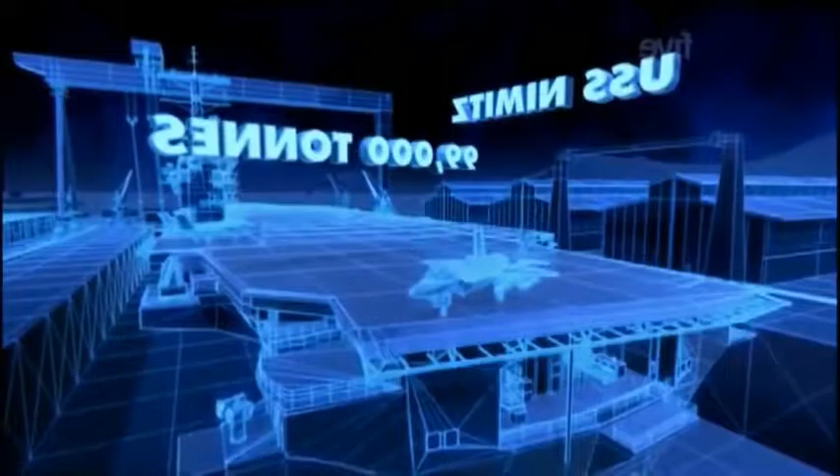There have been 7 key stages in the development of aircraft carrier design, and 7 key carriers. At the heart of each vessel lies a major technological advance that allowed them to increase in size. One by one, traveling up the scale, we'll reveal the thinking behind each breakthrough. 7 ingenious leaps from big to bigger into the world's biggest.

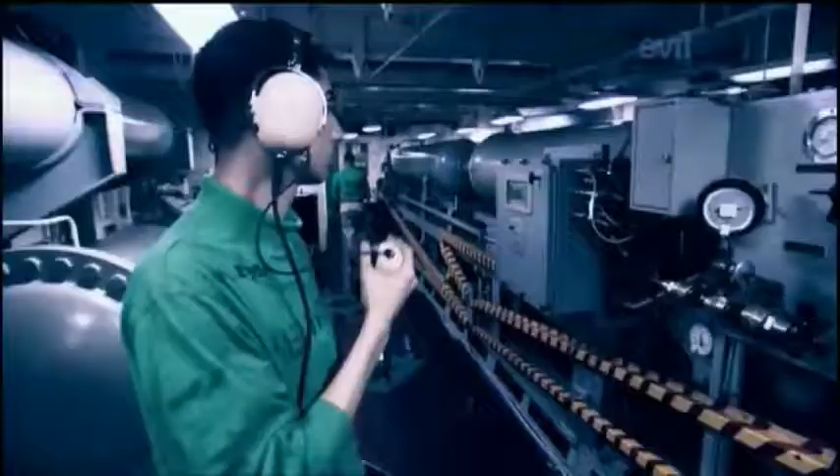The Nimitz can cruise at over 55 kilometers an hour, sail for over 20 years without refueling, and house 6,000 men and women. She can detect threats over 500 kilometers away and launch a supersonic fighter every 20 seconds to intercept them. She is a masterpiece of military engineering.

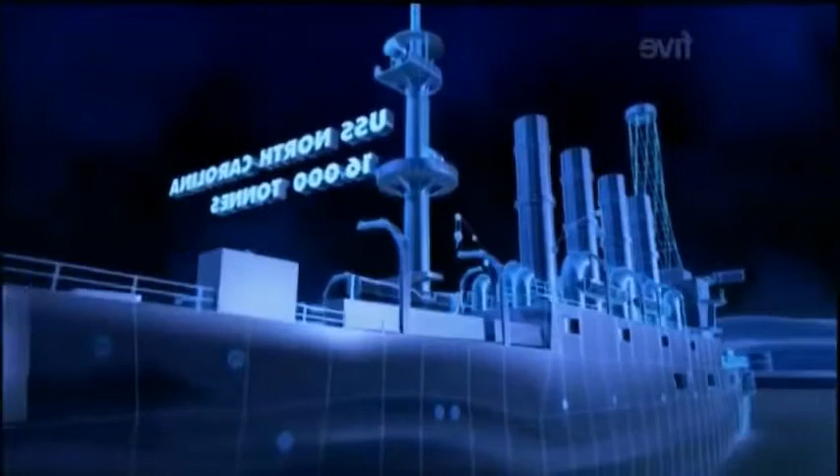To understand how the Nimitz became the most powerful warship ever built means traveling back to 1916. Almost as soon as people learned to fly, the US Navy saw the potential of launching warplanes from the deck of a ship. That ship was the USS North Carolina. Reaching takeoff speed requires a long runway. But the decks of warships were crammed with weapons and equipment. There was no room for a long takeoff strip. So engineers had to devise a way of getting an aircraft up to takeoff speed on a very short strip.

The fundamental problem is down to a basic law of physics. If you want to launch a large mass in a short space of time or distance, you've got to give it a lot of stored energy very rapidly. This is the basic kind of technology that's been known for thousands of years, the slingshot. I store the energy by stretching the elastic. I put my aircraft in it, store the energy, let go, and it flies wonderfully. But of course, this isn't a real aircraft with a real pilot. The challenges of making it work in the real world are much more significant.

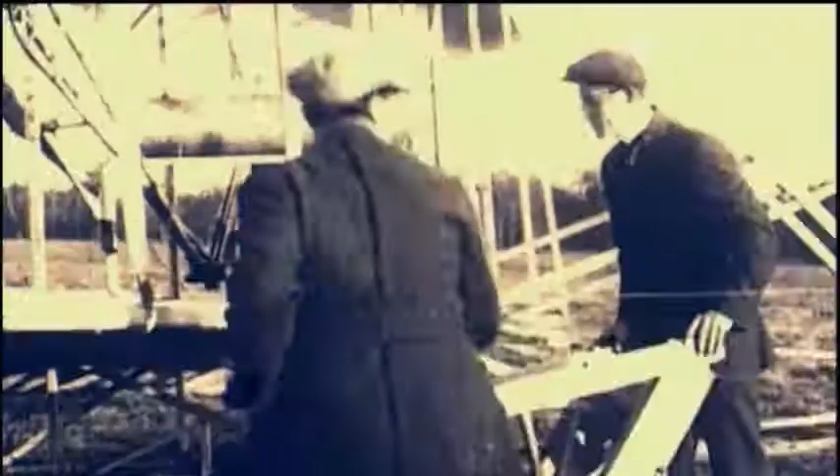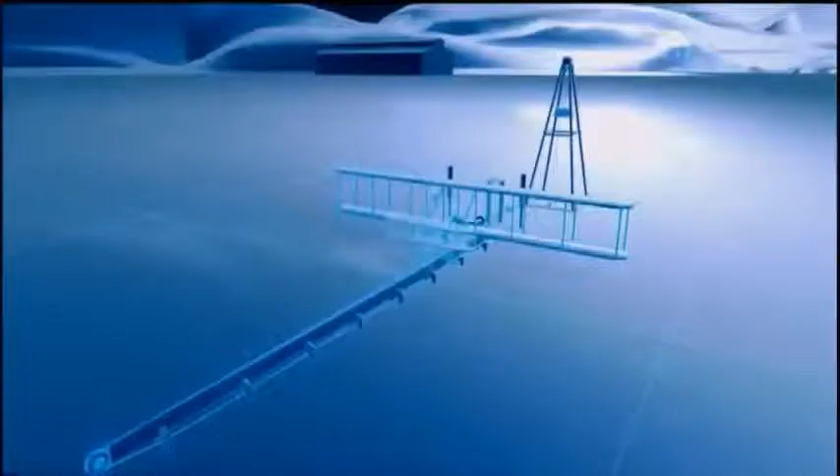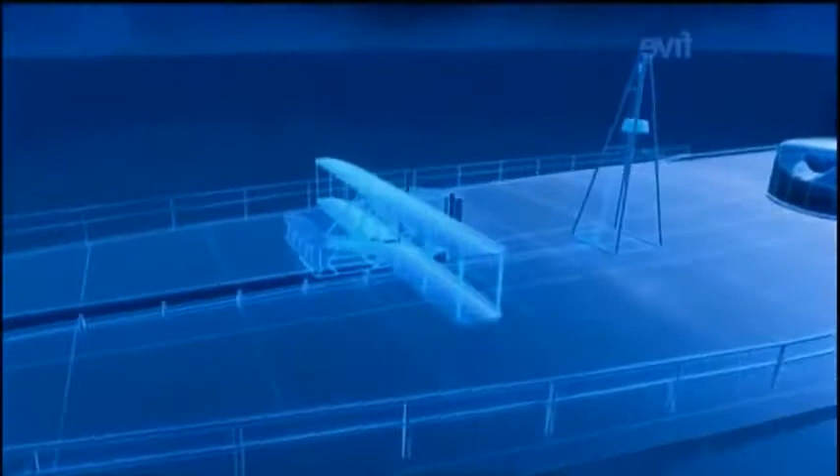The solution came from the fathers of aviation, Wilbur and Orville Wright. In 1903, they made the first powered flight and went on to develop their own launcher, a catapult. Their design consisted of a 6-meter-high wooden tower. This held a weight suspended from a rope. As the weight dropped, the rope pulled the plane along a rail until it reached takeoff speed. The Wrights offered their launching system to the US Navy. But dropping a heavy weight on the deck of a warship was not such a good idea. The Navy went back to the drawing board.

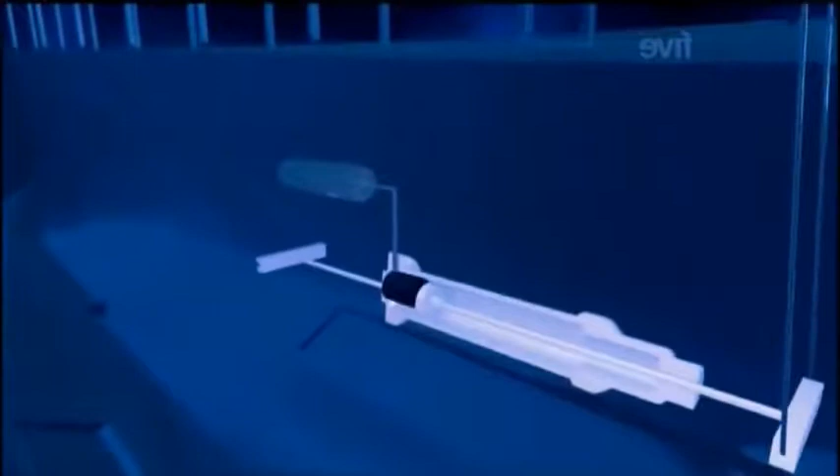So they came up with a better idea. Another form of stored energy on board was compressed air, installed in warships for things like launching torpedoes and so on. Compressed air can be released and give thrust. So in a simple way, we can use compressed air to release an aircraft from a warship. In 1916, the US military tried out the idea on the armored cruiser USS North Carolina. Engineers built a 30-meter steel track at the stern of the ship. They used compressed air to shoot a piston down a cylinder. The piston used a rope to pull the plane along the track.

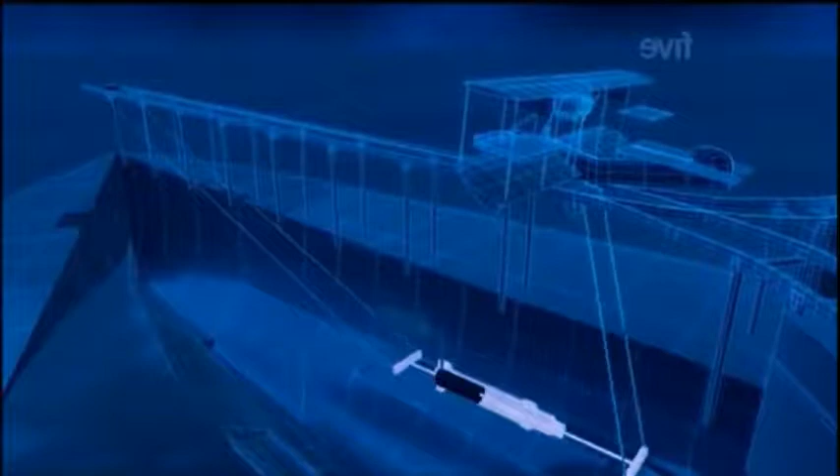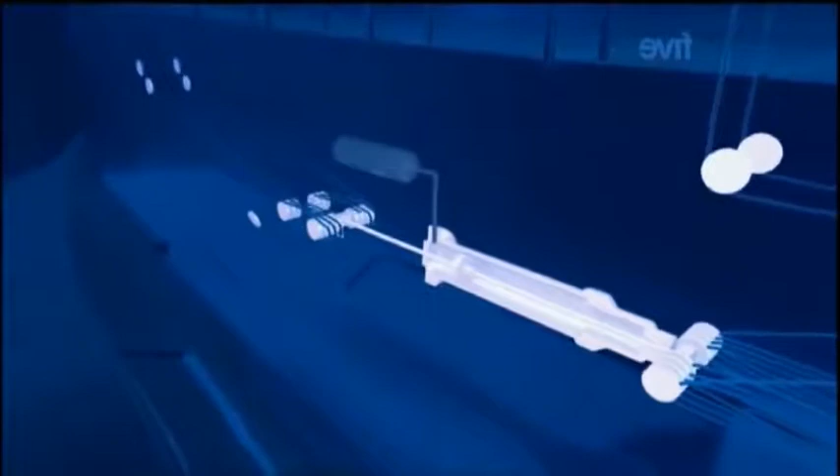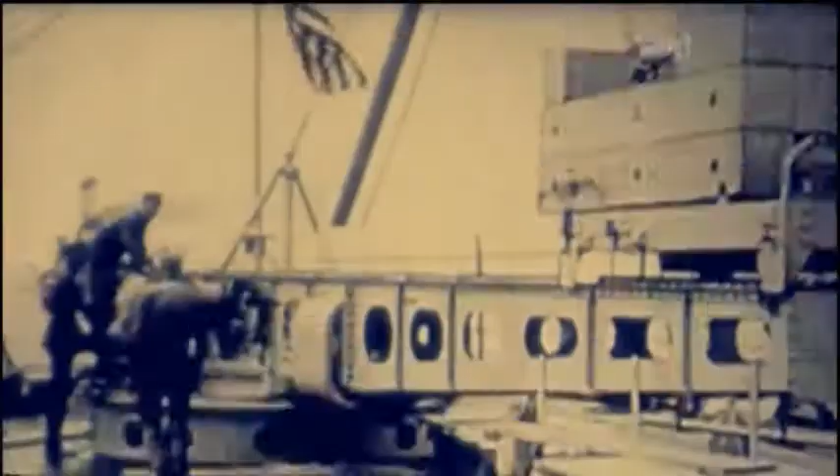But compressed air alone was not powerful enough to launch an 800-kilogram plane. To speed it up, they fed the cable through a system of pulleys. These multiplied the force and increased the plane's speed sevenfold. The system took years of trial and error to perfect. Before this invention, the might of a naval power had been measured by the size of its battleships. But now, the flimsiest biplane launched from a carrier could sink the biggest warship. The aircraft carrier had come of age.

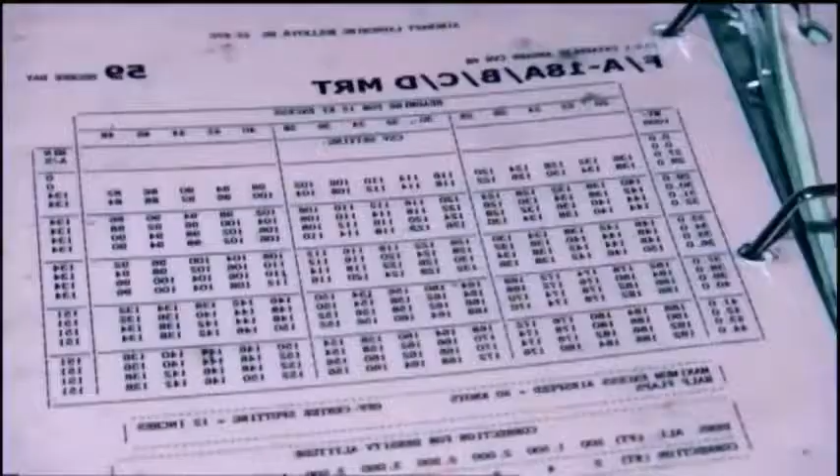Today, catapults are at the working heart of the USS Nimitz. Without the catapults, we have no other means of getting the aircraft off to do their missions. It's basically just a giant slingshot. It's the task of the shooter to tune the catapult to launch aircraft of different sizes. As a shooter, my job is to take the weight of the aircraft and the wind that we actually have over the deck and use that to determine a setting that we put into our catapult system to shoot it off the front. Lieutenant Kozlowski adjusts her catapult to launch a series of F-18 fighters. Each catapult has enough muscle to throw a Land Rover a kilometer.

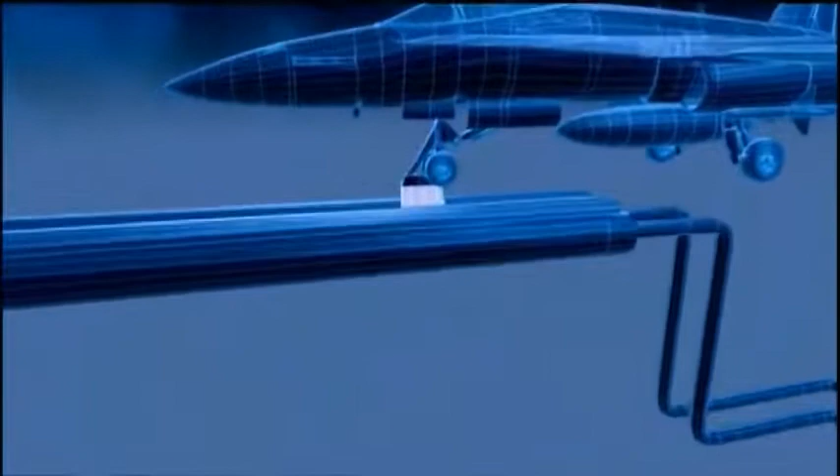The secret of its power lies hidden beneath the deck. Instead of complicated pulleys and wires, the Nimitz has a pair of cylinders slung below its runway. Inside these cylinders are pistons. The pistons connect the plane through slots at the top of each cylinder. They fill the cylinders with pressurized steam which shoots the pistons and the plane forward. To prevent the steam escaping, they fit two strips of flexible metal that act like zippers and reseal the slots as the pistons pass through.

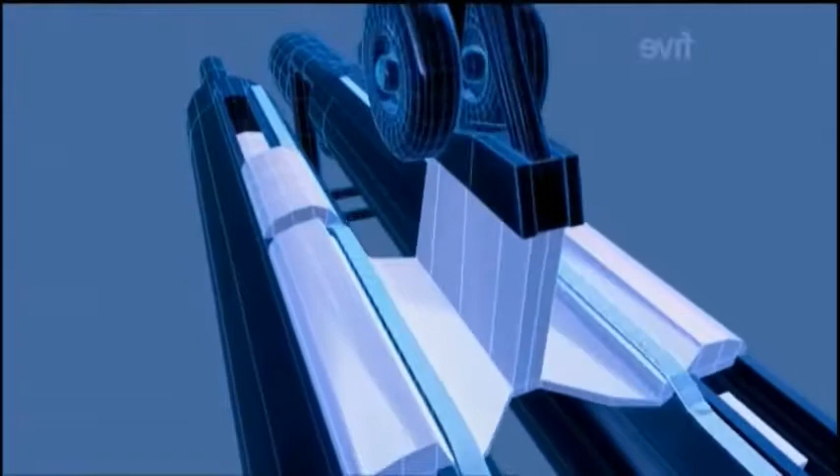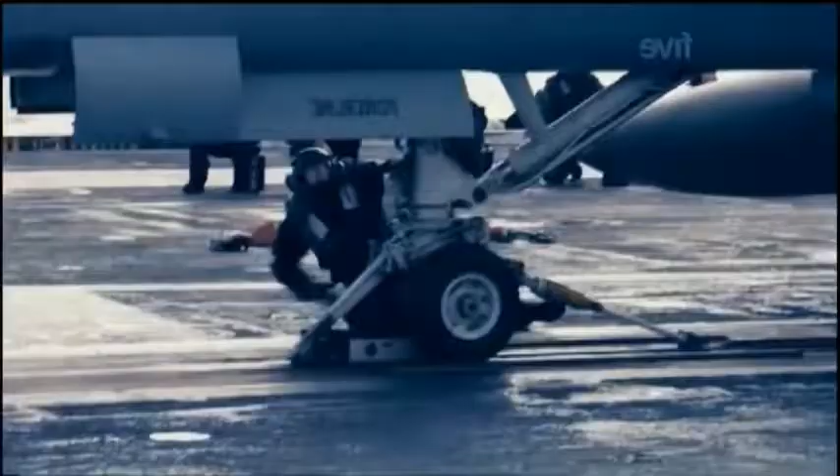They'll salute us before we send them off the bow, telling us that they're ready to go. And then we'll hit the fire button. On land, it takes over 1,500 meters to get an F-18 airborne. But the steam catapult does it in less than 100.

But in 1916, the USS North Carolina had a huge drawback. No deck for her planes to land on. So they had to land on the sea and then be winched back on board again. Hardly practical for a ship at war. Solving the problem would require British ingenuity and a new kind of ship.

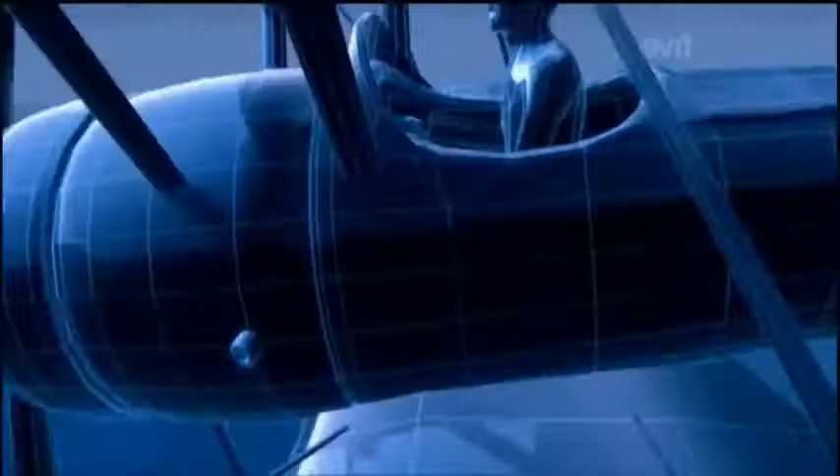In August 1917, Royal Navy pilot Edwin Dunning attempted the first landing on a moving ship. The obstacles he had to negotiate included the ship's central bridge and funnel, known as the superstructure. In a truly audacious move, Commander Dunning swooped sideways in front of them and landed on the front deck.

5 days later, he tried to repeat his trick, but as he touched down, the engine stalled and he lost control of the plane. The deck crew tried to grab the powerless aircraft, but strong winds blew it over the side. Dunning was knocked unconscious and drowned in his cockpit. Commander Edwin Dunning proved that a deck landing was possible, but it had cost him his life.

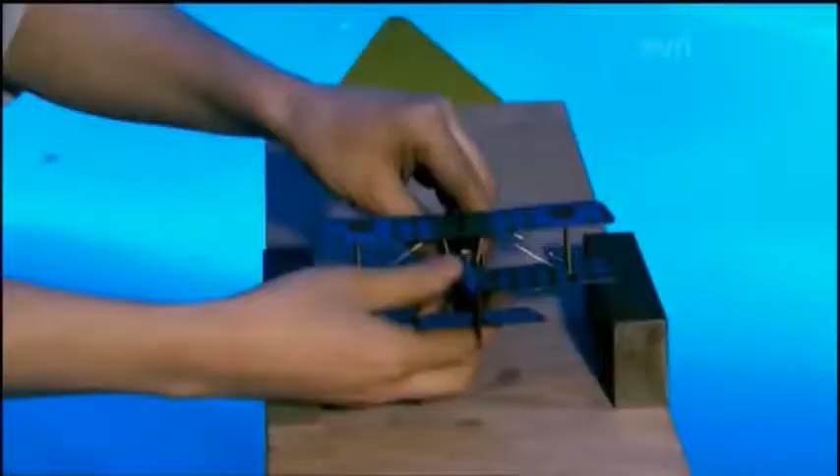Making the deck safe for landing would mean redesigning the ship's superstructure, the obstacle that had blighted Dunning's approach. One proposed solution was to split the superstructure into two parts, moving them either side of the flight deck. But the gap between the two blocks was hardly wide enough to allow a plane to land, and the designers feared this would unnerve their pilots. They considered removing one of the blocks. Not such a good idea.

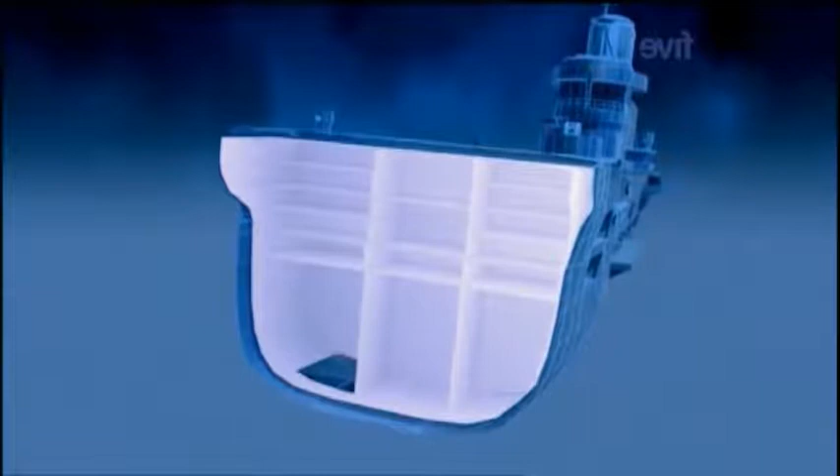The Royal Navy searched for a way to offset the weight of the block they now called the island, to correct the ship's balance. They tried filling the port fuel tanks whilst leaving the starboard tanks half empty. But as she began to run out of fuel, the ship started to list again. Then they tried moving the entire hangar to port, leaving behind an empty space. But the crew soon filled the void with equipment, and the ship regained its starboard list. Finally, they decided to physically extend the hull outwards on the port side and shifted the heavy machinery to balance the boat.

After 2 decades of trial and error, the Royal Navy now had a truly revolutionary design. HMS Ark Royal was launched in 1937. She was the mother of all modern carriers. Her island sat on her starboard side, making space for a long, clear flight deck. Her layout provided the template for every carrier to come, including today's Nimitz.

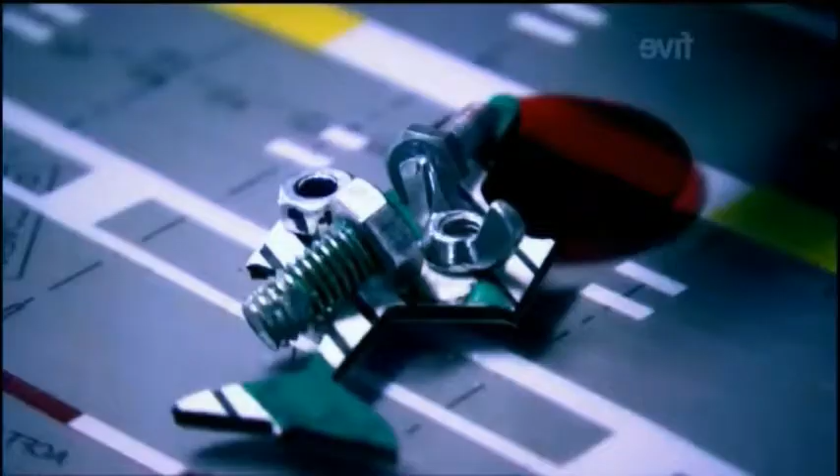Now these nuts and bolts, they represent different things. This means that it needs an aircraft that needs to be turned, its engine's turned, and then this one means it needs fuel. It helps us keep track of everything going out on the flight deck. Since it moves at such a fast pace out there, they're constantly updating this board.

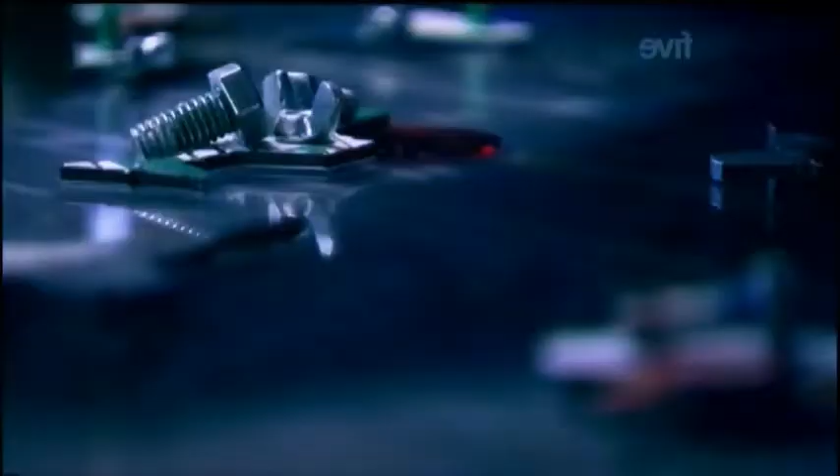Got to get him out. I got to clean up L4. I've got to drop this guy down off into the hangar. And if you want, you can put 203 on the elevator. It really doesn't matter to me. This is always reliable. If we have a power outage, I can always rely on this being up and running. Hey, before you put something in L1, make sure it's got missiles on it, right?

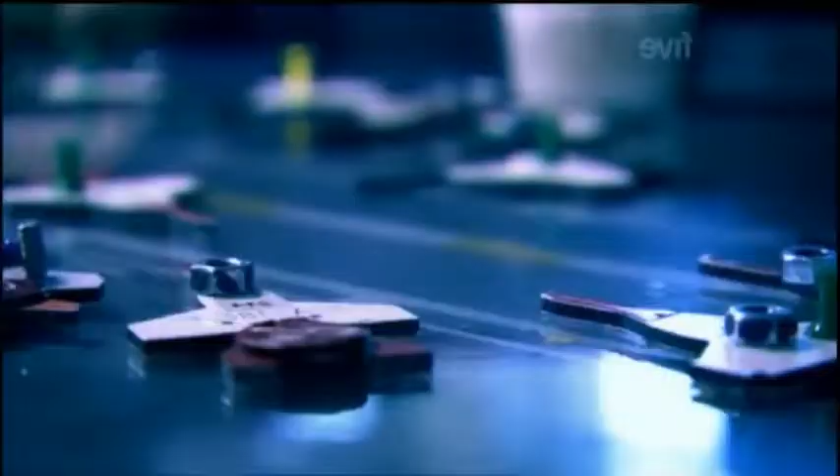The Nimitz can operate more aircraft than any other carrier in the world. Up to 90 warplanes.

In 1938, the biggest British carrier could only handle about 50 aircraft. American admirals wanted to double that number. But there wasn't enough room in their hangar to store the planes, even with their wings folded. So the deck had to take the overspill. This was potentially disastrous if an aircraft misjudged its landing.

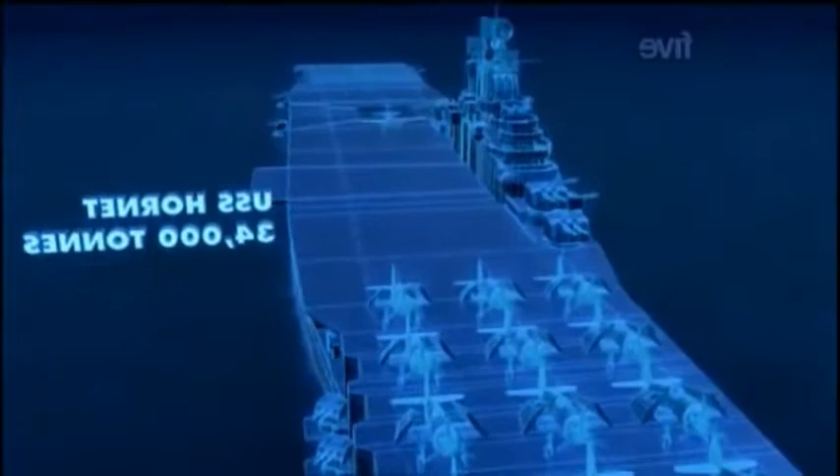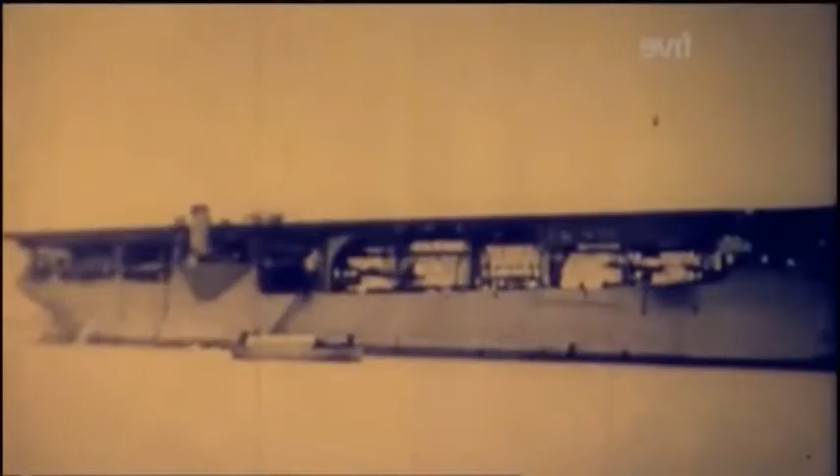To solve the problem, the US Navy had to look to the past for inspiration. From the time of the earliest carriers, engineers had experimented with ways of slowing planes down by snaring them with so-called arrestor wires. Well, the earliest systems consisted simply of ropes attached to pairs of sandbags. And the aircraft would come down and engage this rope, but of course one set of sandbags was not enough to stop a heavy aircraft.

So as the aircraft proceeded down the flight deck, it had to engage successive pairs of sandbags until there was enough resistance to stop the airplane. This simple system, of course, was nowhere near adequate for high-performance aircraft, so other more complex systems had to be developed. On the USS Hornet, they had to stop a heavy warplane landing at over 135 kilometers an hour in just 45 meters. This is how they did it.

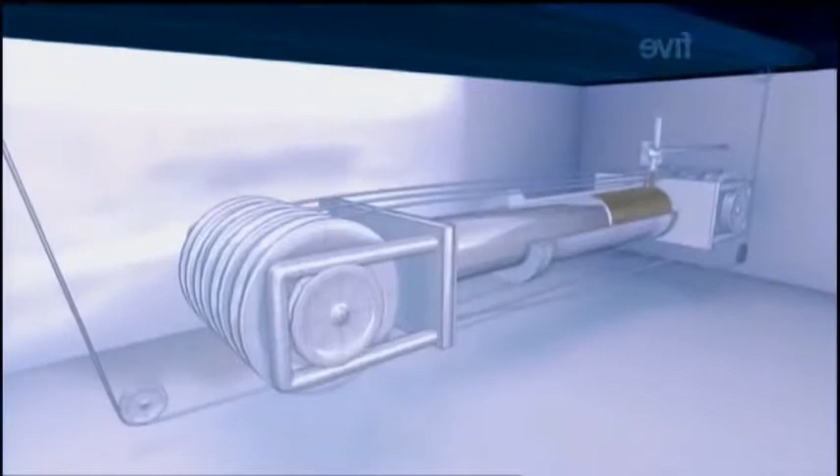As a plane lands, a hook on its tail snares a wire and pulls it forward. Beneath the deck, this action forces a ram into a cylinder filled with fluid. The plane's momentum is dampened as the fluid is squeezed up a tube and through an opening made ever smaller by a closing plunger. An elegant idea, but in practice, snagging a single wire proved difficult for pilots to do. So the engineers lined up several wires, one behind the other, to increase the chances of a successful grab. But even this didn't guarantee success.

During the Second World War, it was fair to characterize the landings as looking like a controlled crash. As the pilot approaches the back of the ship, he's going to fly his airplane into position just above the wires, and then he hopes that the airplane will drop right into the middle of those wires and pick up one of those 12 wires. If they didn't catch any of the wires, then they had 5 what they call Davis barriers that would engage the landing gear on the aircraft and stop it that way. Unfortunately, these Davis barriers normally would flip the airplane upside down, but it would definitely stop.

Today, on the Nimitz, they use a similar arrestor wire system. But trapping the wire has become even more difficult. Jets hit the deck so fast that the pilot has precious little time to guide his plane onto the wire. It's so hard that pilots have to practice over 100 simulated landings before they're allowed to try the real thing.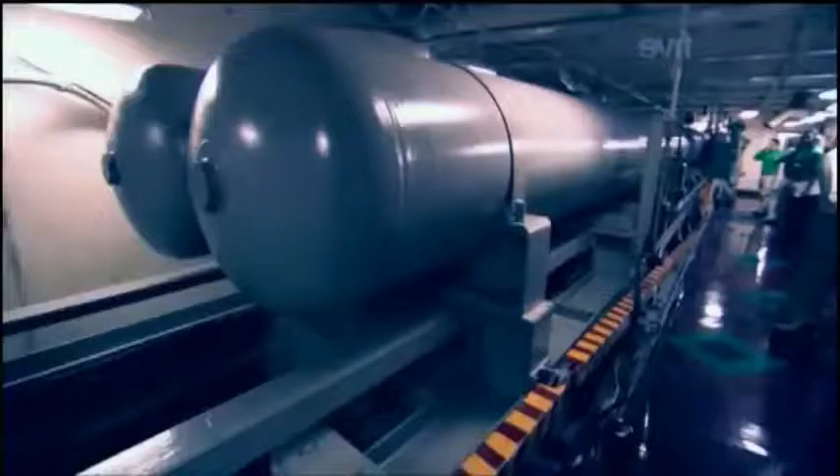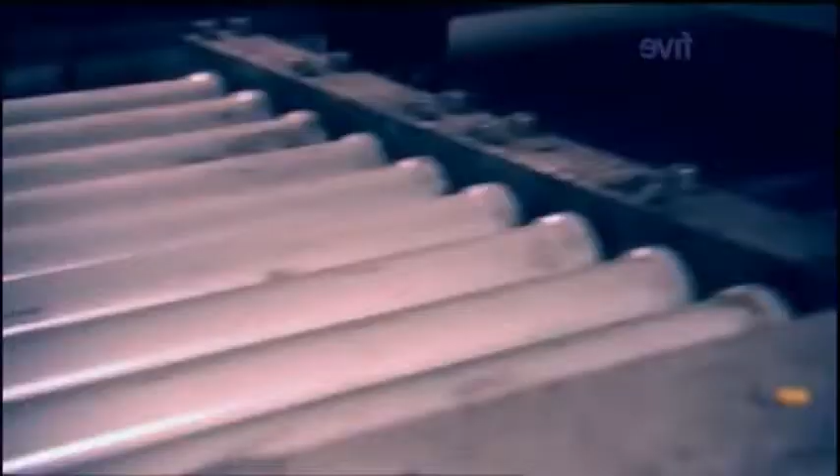The jets landing on the Nimitz push its arrestor system's braking power to the limit. It has to bring an F-18 traveling at 225 kilometers an hour to a stop in just over 100 meters. About the length of a football pitch. The quality of each landing is assessed by senior pilots standing at the stern. We will grade them on their start, the in-the-middle position, at the in-close position, and then again as they cross the ramp. And then the grade goes into an overall grade point average for how everybody's doing.

Every pilot in every squadron thinks they're the best. Definitely me. Who's the worst pilot? That guy.

The arrestor wire allowed planes to land safely on a crowded deck. But during World War II, the deck itself became a target for enemy bombers. Protecting the ship from bombs would demand a total rethink, and was to double the size of the aircraft carrier. March the 19th, 1945, a naval catastrophe. Japanese bombs penetrated the USS Franklin's wooden flight deck and exploded in the hangar below. 724 American sailors and airmen were killed. The US Navy resolved never to allow this to happen again.

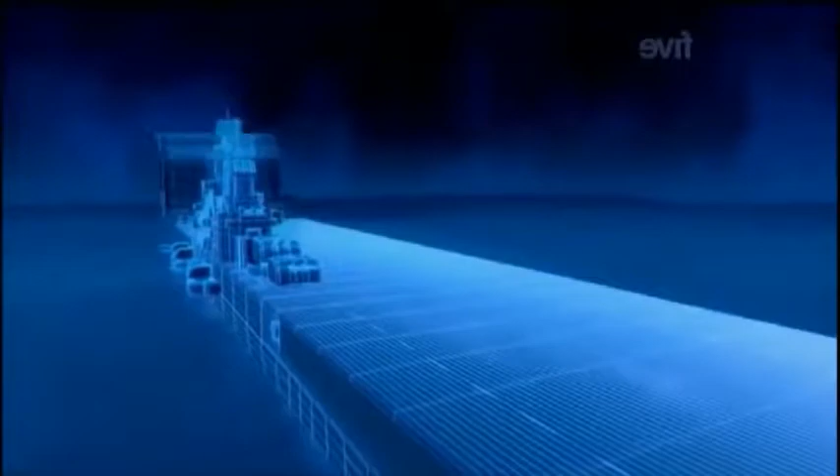They decided to protect the crew by replacing the wooden flight deck with armored steel. But this caused huge problems for ship designers. When you replace a deck made out of wood with one made out of armoured steel, your real issue is to do with adding top weight and making the vessel top heavy. This causes the vessel to reduce its stability, which makes it vulnerable to capsize in waves.

To make the ship more stable, the hull has to be made wider. But a wider hull meets more resistance than a thinner one and impedes the ship's movement through the water. To restore speed, they had to make the hull more streamlined. This made the ship longer, but also heavier.

The mighty USS Midway was the product of this thinking. She weighed almost twice as much as her predecessors, and for the 10 years after the Second World War, she was the largest ship in the world. Her deck was protected by 3 acres of armored steel, 9 centimeters thick. It shielded her so well that she served for 47 years.

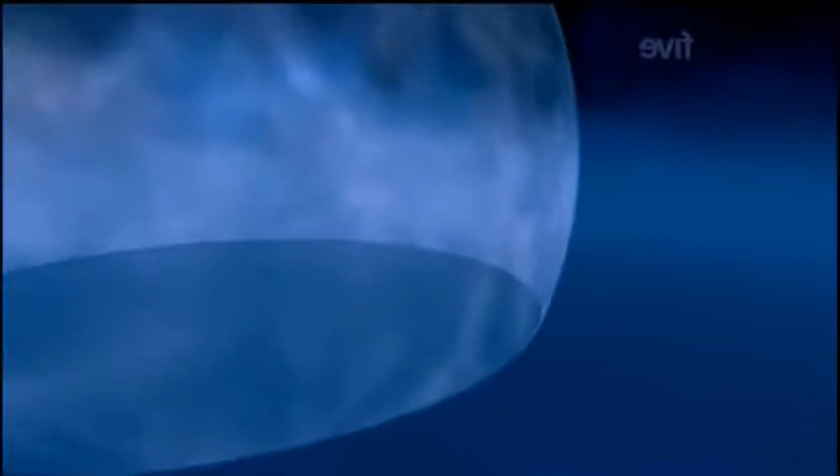The deck of the Nimitz is also made of steel, but it isn't armor-plated. It doesn't need to be. No attacking aircraft should ever get close enough to drop a bomb on it. Layer upon layer of high-tech protection stands in the way. First, long-range radar scans the sky for intruders. Should there be any, she directs her fleet of F-18 fighters to intercept and destroy them.

If an enemy missile does get through, it will meet her next line of defense. A ring of missile-armed warships. Finally, the Nimitz can unleash her own missiles, each capable of destroying anything that gets within 8 kilometers. These defense systems are operated by the tactical team from a bunker deep within the Nimitz.

Back in 1945, the Midway's armored deck protected her well enough against enemy bombs. But her aircraft were outdated. In the 1950s, Navy commanders wanted jets on their carriers. But jets flew too fast to land safely. It would take 10 years and one inspired Royal Navy pilot before the next breakthrough could be made.

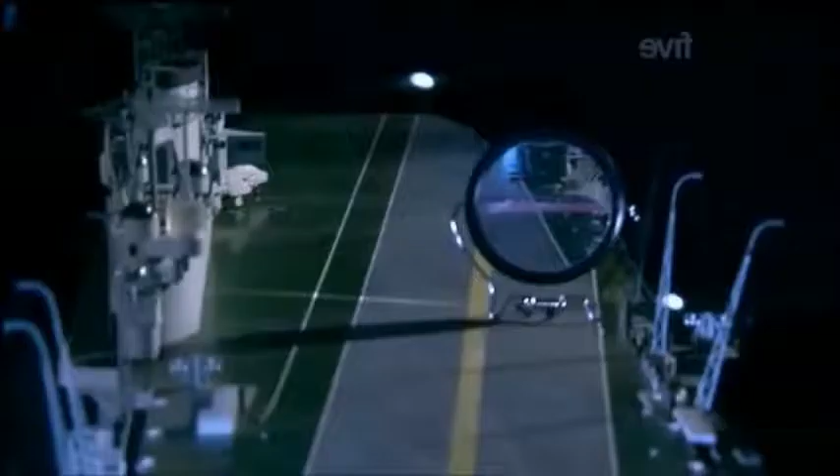And then we invited his secretary to come in, and I said to her, look, now your job, as a pilot, is to see the reflection of the torch in the mirror and walk very slowly towards it, keeping the reflection on the line. By keeping the light level with the lipstick line, the secretary, like the pilot, would naturally follow the correct angle of descent.

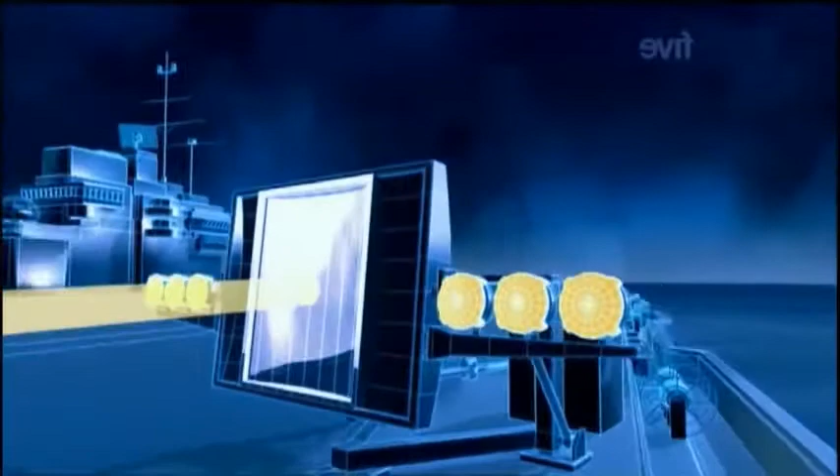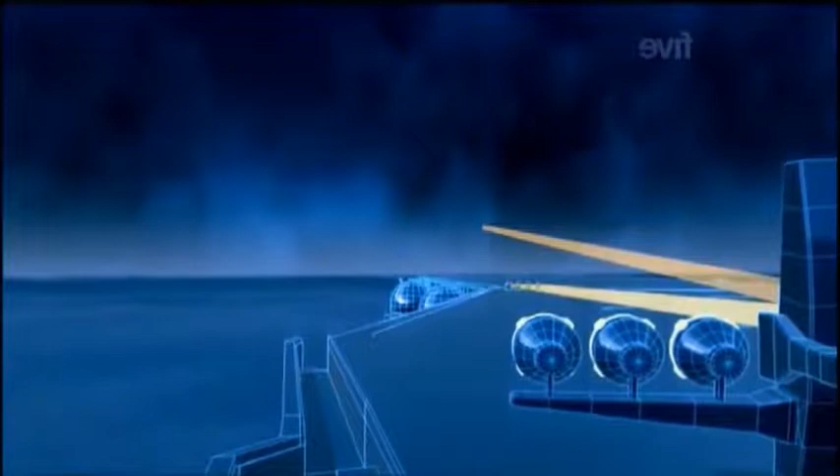Translated onto a ship, this is what's happening. The torch is represented by 3 lights fixed to the deck. Beyond them is the mirror. A row of lamps represent the lipstick line. As the plane approaches, the beam from the deck lights reflects back to the pilot at an angle of 3 degrees. So if the pilot keeps this reflection in the center of the mirror, he will come down at the right angle.

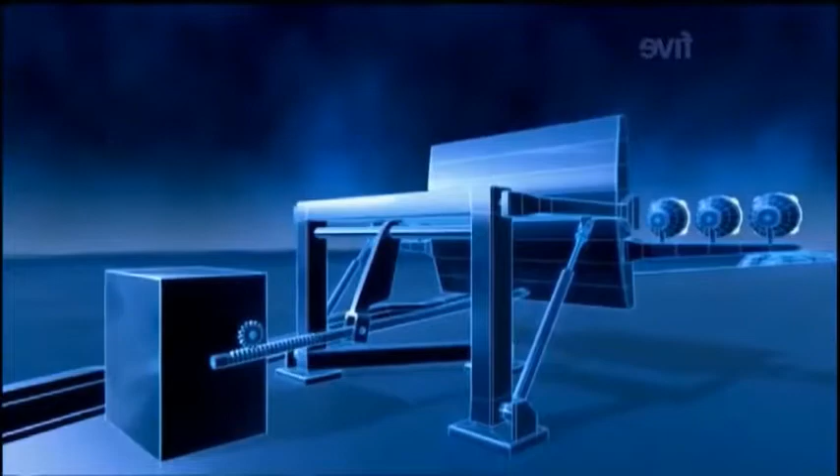But it's not as simple as that. At sea, a ship pitching in the waves throws the beam about, sometimes with devastating results. To stabilize the beam, engineers fixed the mirror on a gyroscopic mount. Now a plane could safely follow the right line of descent, however rough the sea.

This British invention was so good that the American Navy immediately appropriated it. And in 1955, their brand new supercarrier, USS Forrestal, put the ingenious device into practice. It allowed a whole new generation of supersonic fighters and nuclear-armed bombers to land on her decks safely.

Today on the Nimitz, they use an improved version of Admiral Goodhart's landing aid. Pilots call the central lamp in this row of lights the meatball. It is fitted with a special lens so that the approaching pilot can only see its light when he lines up his aircraft to come in at the correct angle.

The system stands up well to the demands of modern warfare and its frequent night operations. On a clear night, pilots can see the meatball as far as 6 kilometers out. Even so, trainees are not allowed near a real plane without conducting 10 hours of simulator rides first.

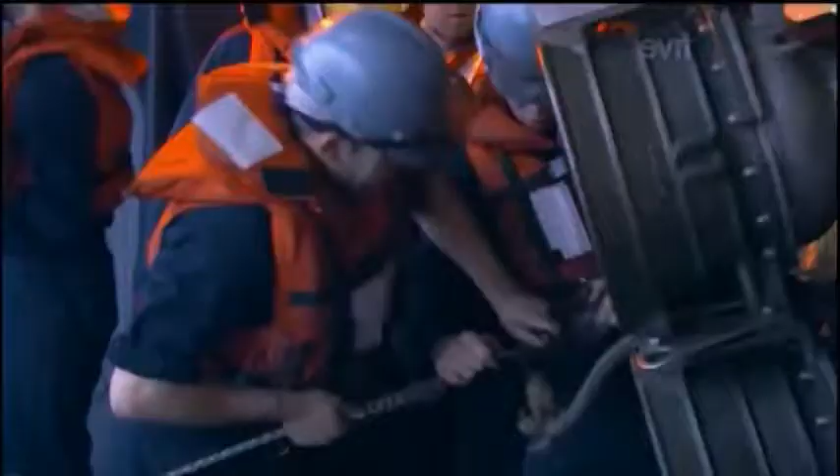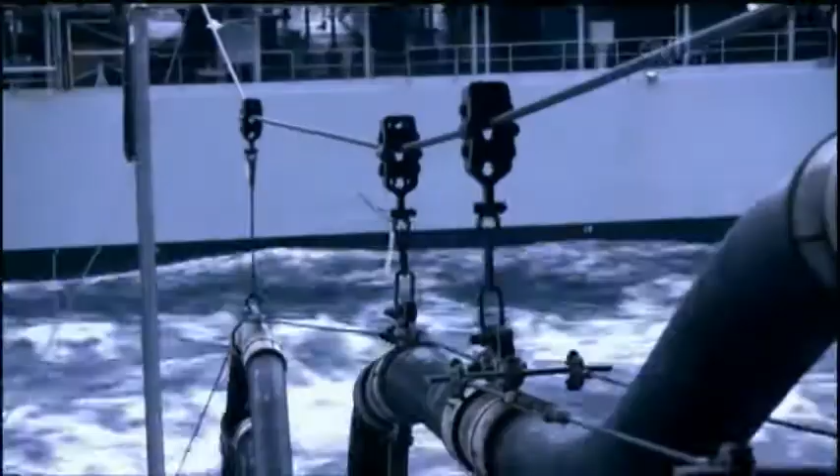Then, once the line is connected, they transfer more than 2 million liters of fuel. The process ties the carrier to a slow tanker and leaves both vulnerable to attack by enemy aircraft and submarines for several dangerous hours. There had to be a better way.

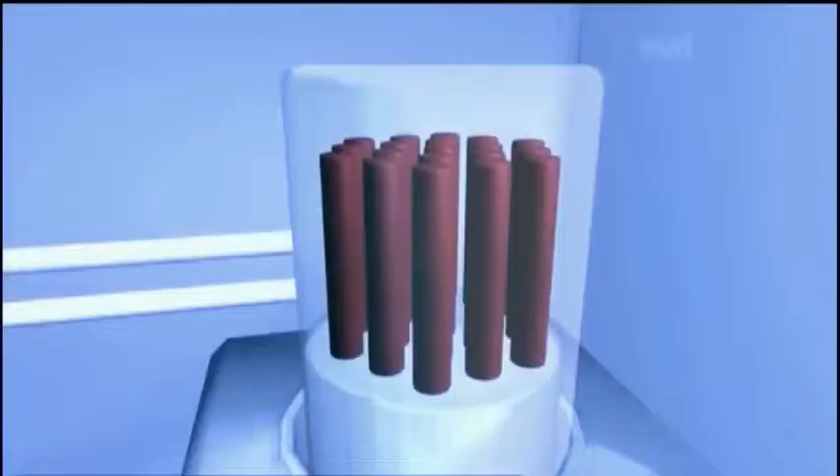One solution: harness the colossal energy released by the splitting of an atom to produce nuclear power. Scientists discovered that firing particles at atoms of uranium loosens the bonds that hold their tiny components together. A chain reaction in a nuclear power plant in the bowels of the ship triggers a massive release of energy in the form of heat. This heat can then be used to generate steam.

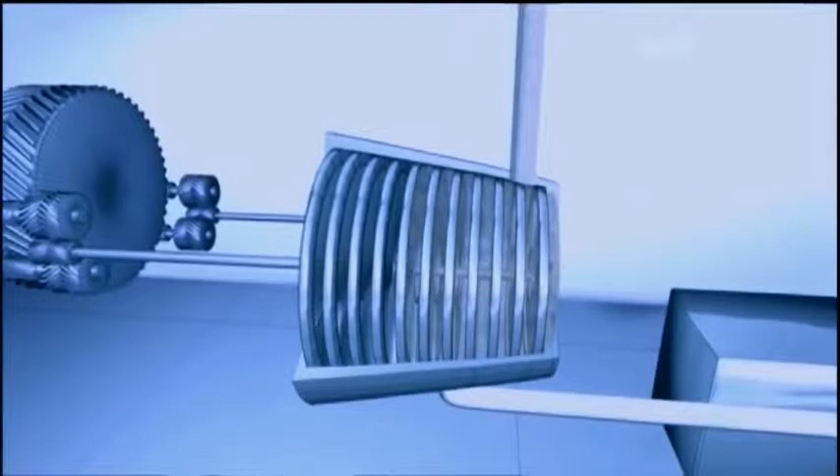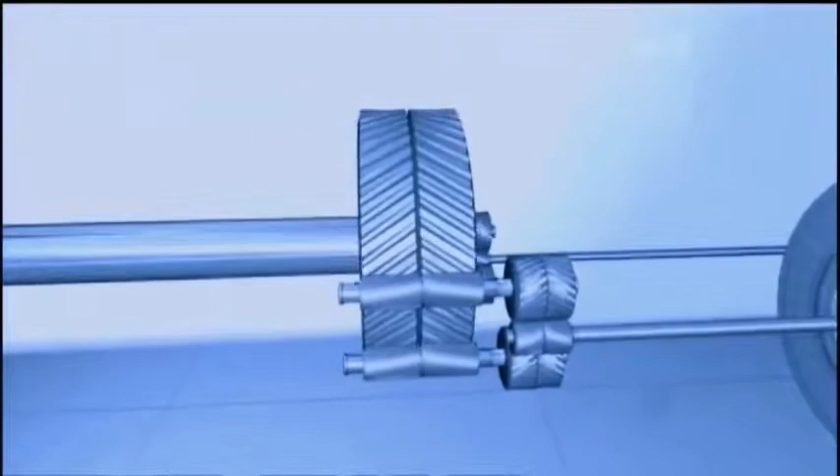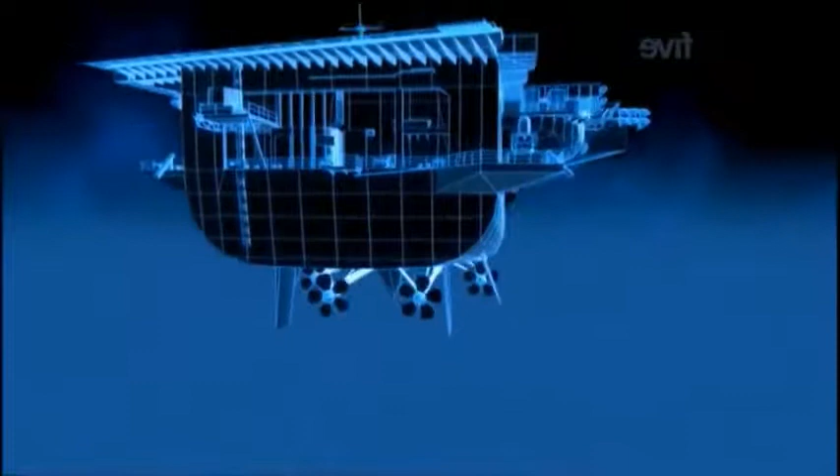Shooting the steam through a turbine forces its blades to rotate at high speed. And transmitting this movement through a set of gears generates enough turning power to spin an enormous shaft attached to a propeller. 4 of these propellers together have the power to push 91,000 tons of metal through the water at 55 kilometers an hour.

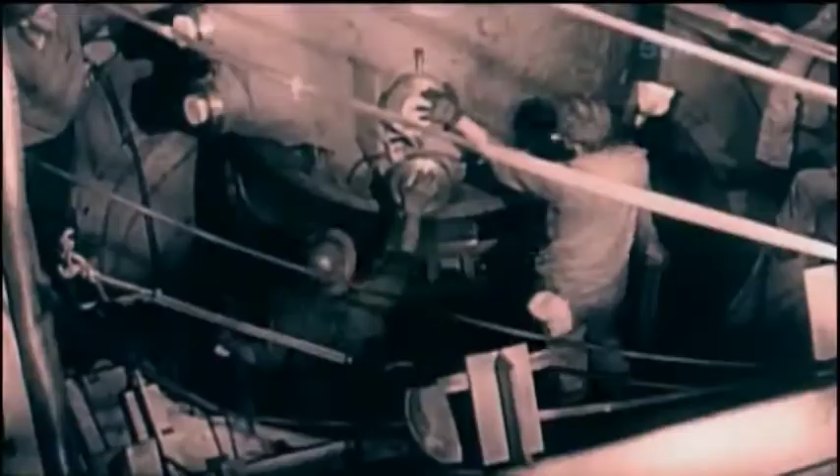But nuclear power came at a price. To protect the ship's crew from deadly radiation, the engineers had to shield the reactor with hundreds of tons of lead. But a supercarrier needed 8 reactors. And in heavy seas, the extra weight in the middle of the hull could have caused the keel to buckle.

So they strengthened the keel with a honeycomb structure of steel cells. These took the weight of the reactors and led to the birth of the largest carrier the world had ever seen. USS Enterprise took to the sea in 1961. Her 8 reactors made her the largest nuclear power facility in the world, able to generate enough electricity to supply a city the size of Leeds.

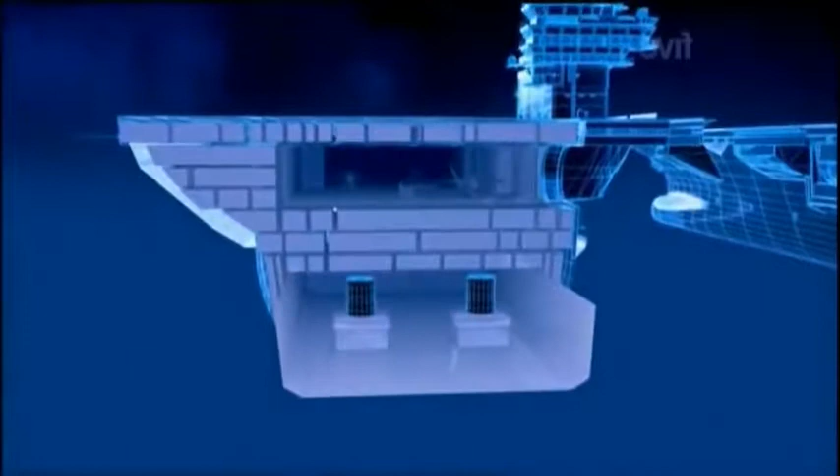And she had one colossal advantage over conventionally powered carriers of the day. She could sail for 3 years without having to be refueled. Today, a Nimitz-class supercarrier only needs to be refueled once every 20 years. And just 2 modern reactors supply her with all the power she needs. The space that once might have been used to store fuel for her engines is now used to store fuel and ammunition for her jets.

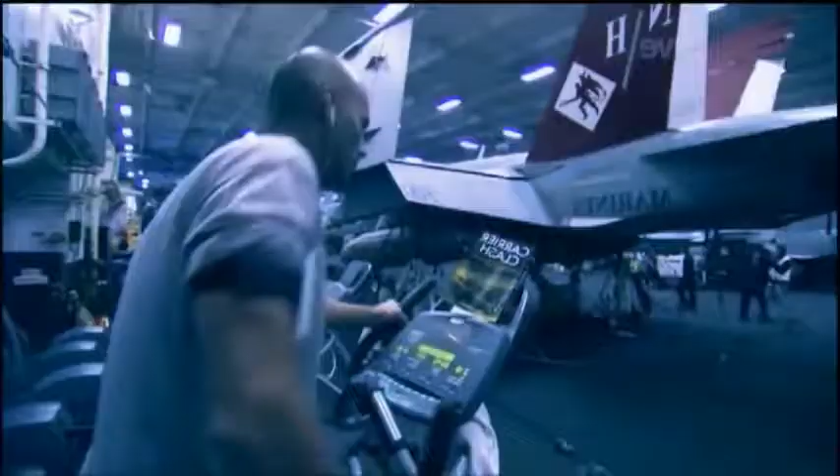Her reactors send electricity down 1,500 miles of cables to support this city in the sea. 6,000 heads lie on 14,000 pillowcases between 28,000 sheets. Each day, cooks prepare 18,000 meals from their supply of 120,000 eggs, 15,000 kilos of potatoes, and 11,000 kilos of meat. But it can be a lonely place.

The worst thing about being on the Nimitz would probably be being away from family. Being away from home. It's the same day over, Groundhog Day. Every day is Groundhog Day. We always joke about it. Every day's Monday. The camaraderie of the pilots out here is probably the only thing that makes it so you can survive with your sense of humor and with your sanity.

Over the past 30 years, this floating community has demonstrated its prowess by delivering air power straight to the heart of the enemy. The Nimitz was commissioned in 1975. She proved so successful that the US Navy would want 9 more like her. But it took a long 7 years before the first one was built and ready for service. And there was only one dry dock in the whole of America big enough to handle a Nimitz carrier. There had to be a quicker way of building the carriers of the future.

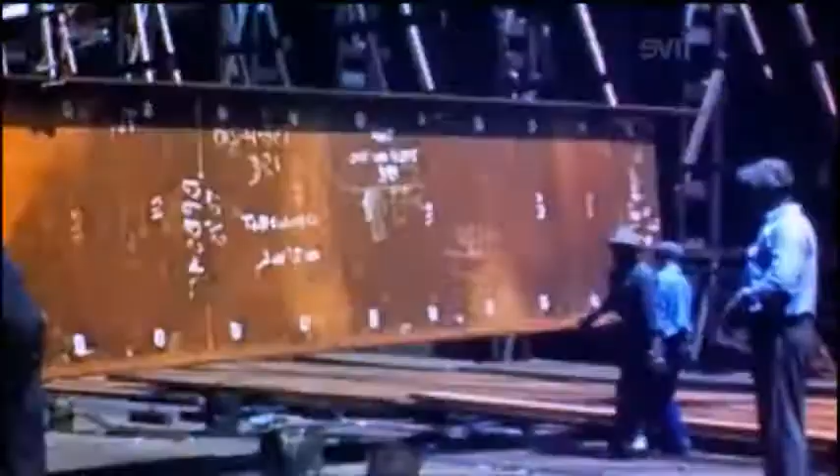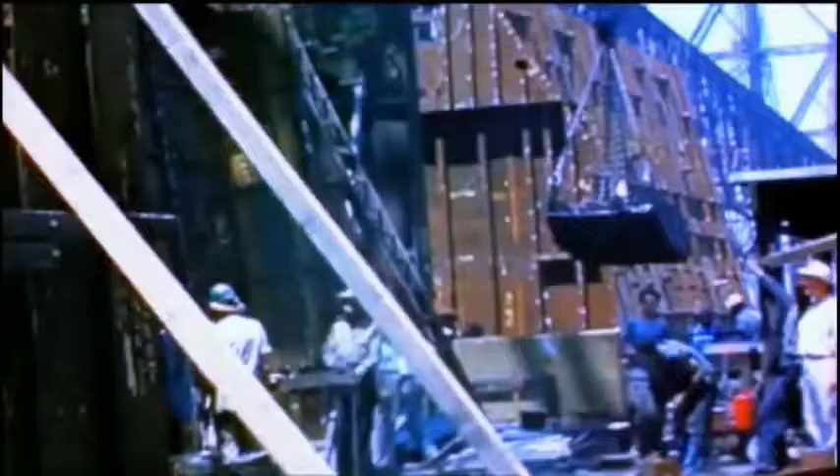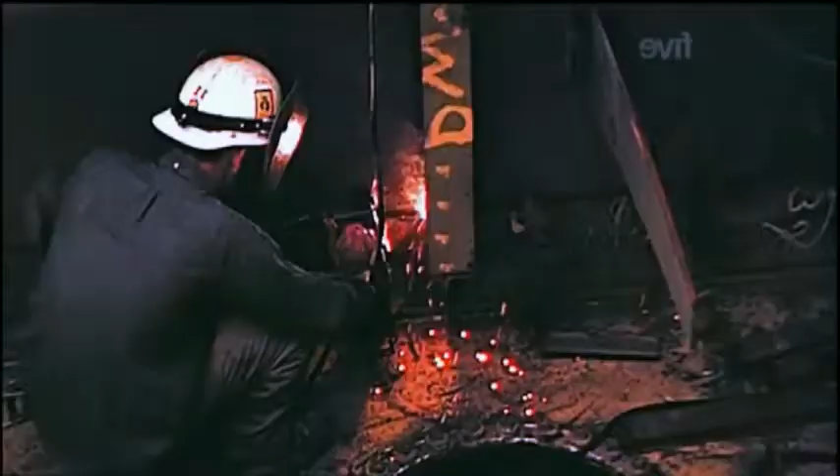Until 1981, the US Navy constructed their carriers like office blocks, building from the bottom up. Each one contained enough cable to stretch from London to Moscow, used 45,000 tons of steel, and needed an army of workers. A huge range of craftsmen were involved. Boilermakers, shipwrights, carpenters, electricians and so on. And that meant that the ship grew very slowly. It tied up a dry dock for a long time. In the congested compartments, the electricians got in the way of the plumbers, who got in the way of the welders. That's why it used to take 33 million man-hours to construct a carrier.

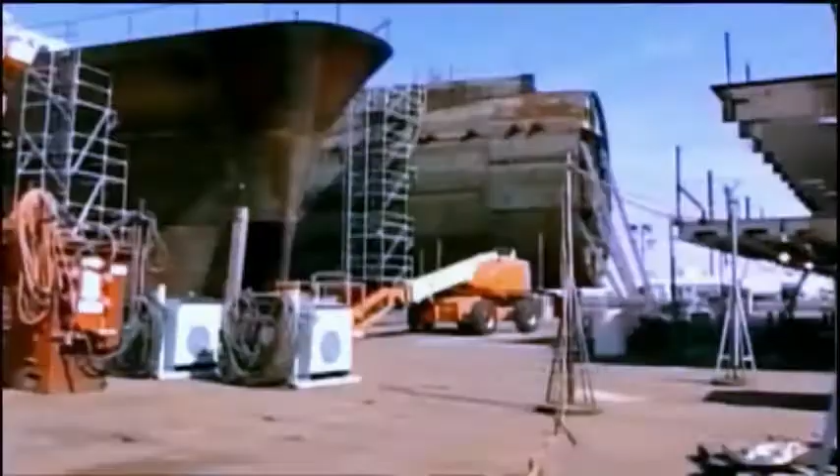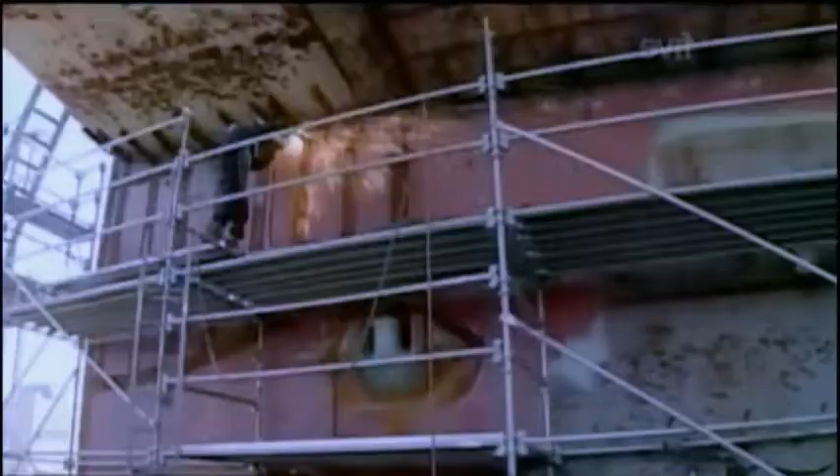Today, they build Nimitz carriers on the dockside, section by section, and then weld the pieces together afterwards. The specialist trades take turns fitting out each module with its cables and electronic systems, its bulkheads and passageways. And as they are no longer in each other's way, they build the ship much faster. A job that once took 3 hours to do in a traditional yard now takes just 1 using the new modular method. Well, there are very, very large pieces that go together. The improvements in computer design, the ability to reduce the number of pieces that go together is going to be a heck of a lot more efficient.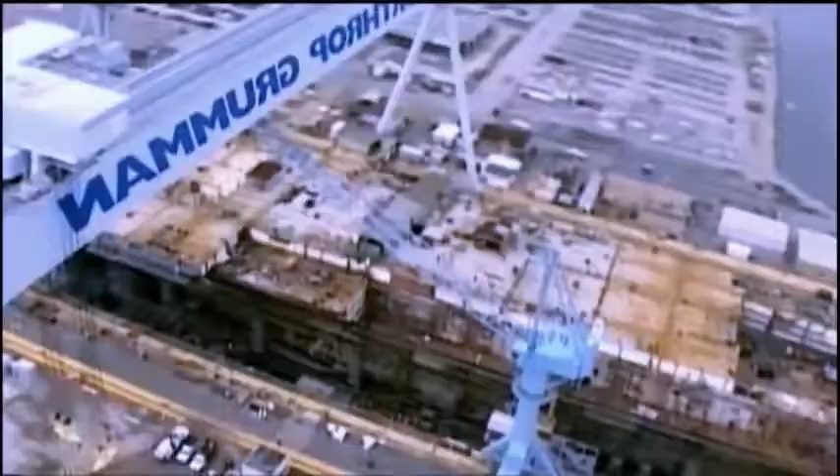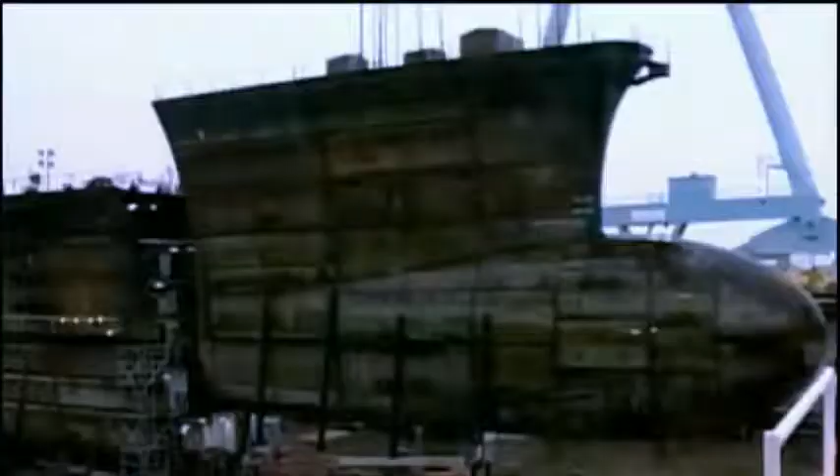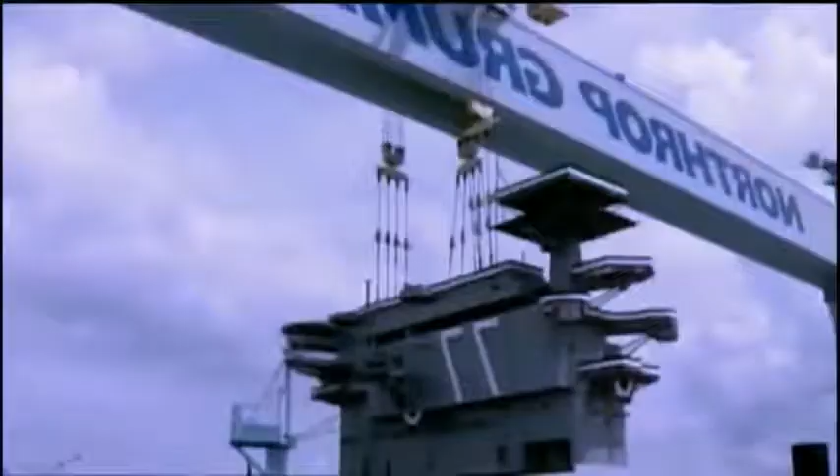They use the biggest crane in the Western Hemisphere to move the modules into position. 161 modules come together to make a carrier. Each can weigh up to 850 tons. Moving the modules pushes the gantry crane close to its lifting capacity. On July the 8th, 2006, workers craned the final piece of the jigsaw into place. It is the carrier's mighty 700-ton nerve center.

Finally, after 3 years of construction, the shipbuilders flood the huge dry dock. Mission accomplished. The latest and last of the Nimitz class of carriers takes the water. So far, the Nimitz carriers have given over 30 years of service. They remain unchallenged as the biggest and most advanced warships in the world. That is, until someone builds a bigger one.